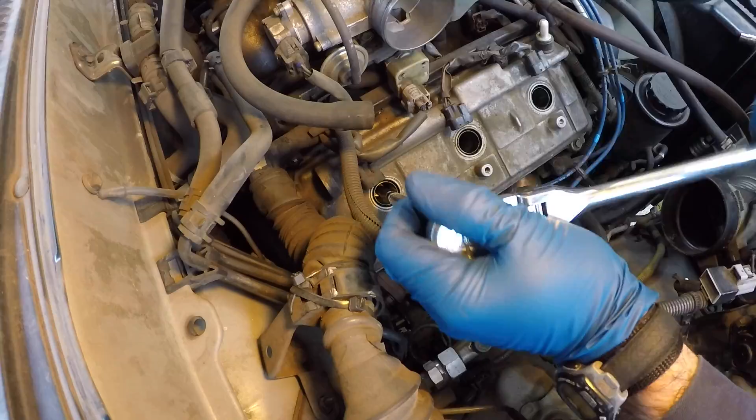What we're going to show you today is how you do a compression test on your engine. Now the engine we're going to be doing the compression test on is actually on my 4Runner. It's the Toyota 5VZ-FE 3.4 liter V6 engine that you'll find on the 3rd generation 4Runners, 1st generation Tacomas, some older T100s and older Tundras.

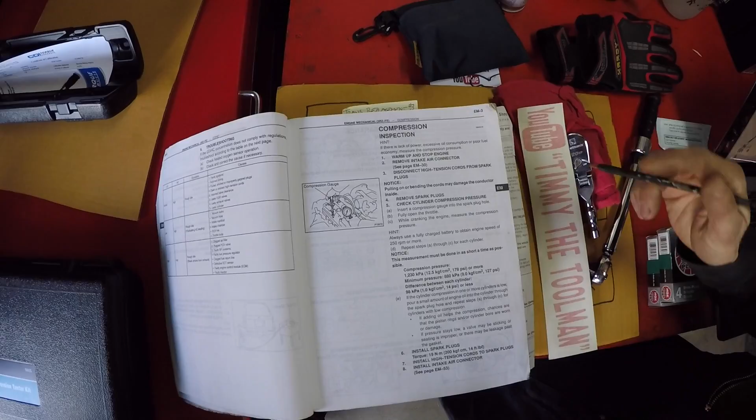A compression test is pretty straightforward. We're going to actually follow the instructions right out of the factory service manual. Let me show you some pages. So basically, they just tell you to start with a warm engine. So you warm it up and you get it to operating temperature.

And then the next thing you do is you remove the intake air connector because that gets in the way of the coil packs on the passenger side, and then you disconnect all your high tension cords, also known as the spark plug wires, and then you remove all the spark plugs, and then you start doing your compression check, and we'll show you that once we get to the engine.

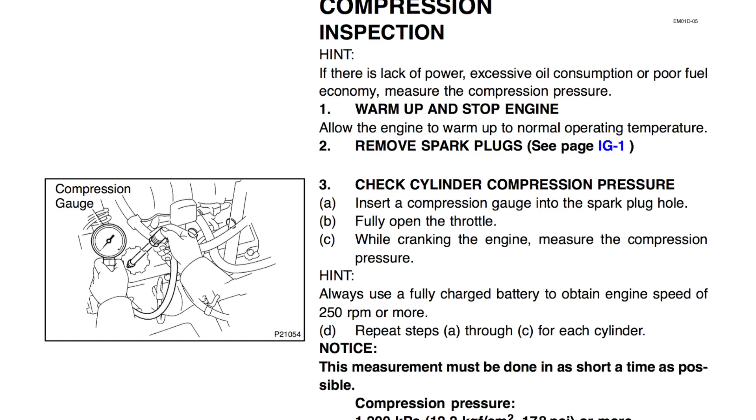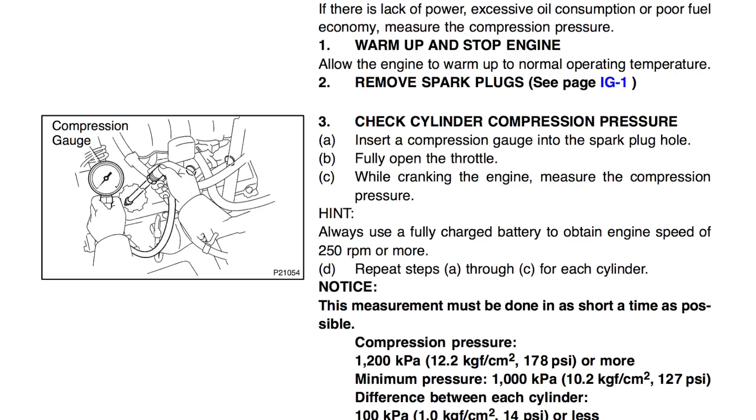Pretty straightforward. It tells you that you have to have a fully charged battery so you can obtain an engine speed of 250 revolutions per minute as you're cranking it over. It mentions having the throttle fully open, so it's called a clear flood mode, and when you push the accelerator all the way to the floor, it basically turns off the fuel injectors. That's the purpose of that, to get air into the cylinders but also to turn off the injectors.

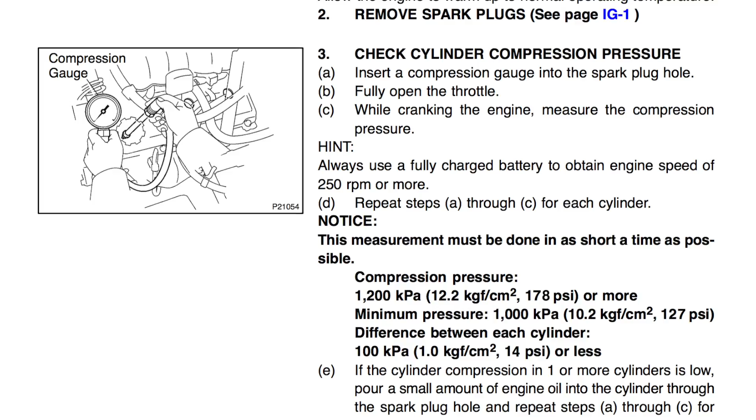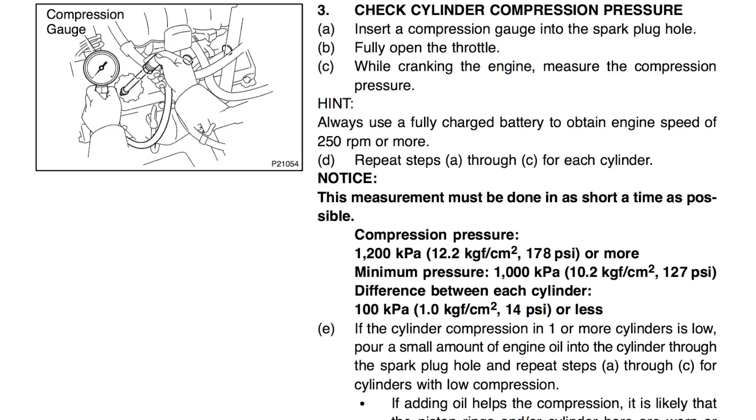Now some instructions say to pull a fuse to disable the fuel pump. Others say you disconnect an electrical connection at the fuel pump, which on our 3rd gen 4Runners is underneath the passenger seat. But you really don't have to do that, because by putting it in clear flood mode with the pedal all the way to the floor, you're going to be turning off the injectors. So you don't have to worry about any gas going into the cylinders while you're doing this compression test.

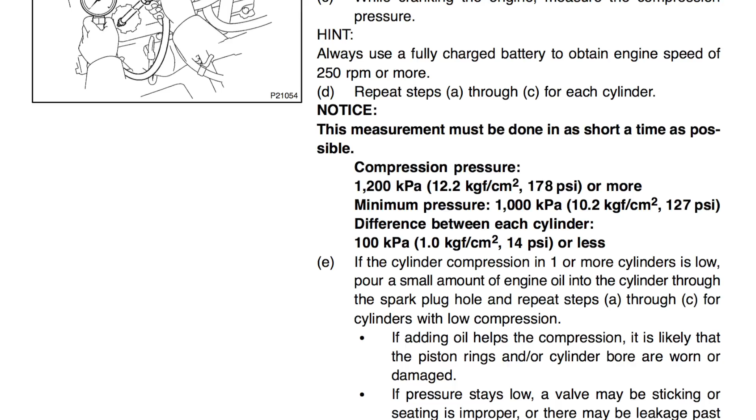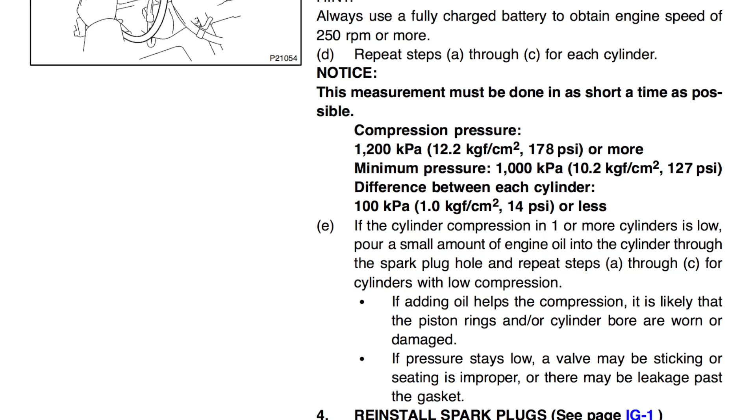Another thing, you have to disconnect the ignition, and by disconnecting the coil packs and the spark plugs, you're basically taking out the ignition component. So no gas, no spark, and then you're ready to go. It also talks about what kind of pressure you're looking for. So ideally you're seeing 178 PSI or more, and your minimum pressure, you don't want any less than 127 PSI, and you don't want to see any more than a 14 PSI difference between the cylinders.

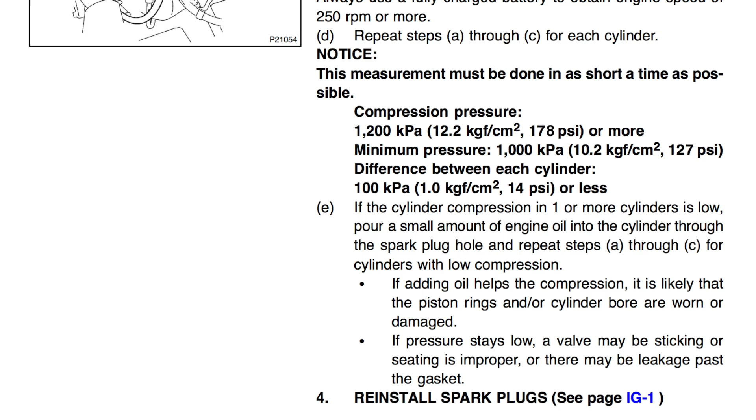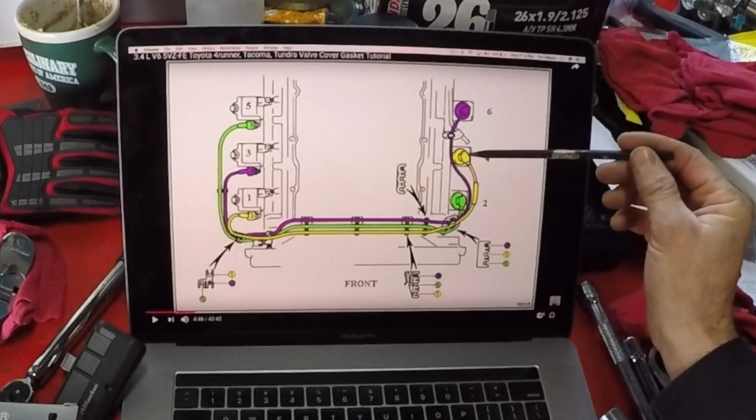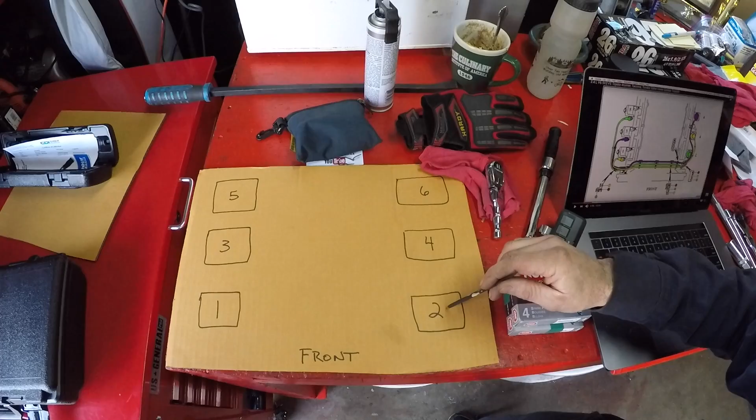Then I transposed that information to a piece of cardboard. When I pull the spark plugs out, I'm going to lay them in their positions. So later on, when I analyze what the plugs look like, I could see just from the wear on the plugs, maybe it'll give me an indicator of something going on with that actual cylinder. So I'm going to keep track of where the plugs go and put them on this piece of cardboard. It makes logical sense when you're going to be doing this.

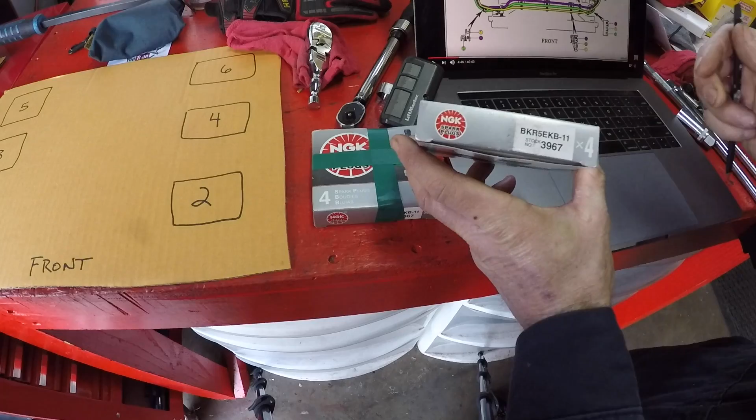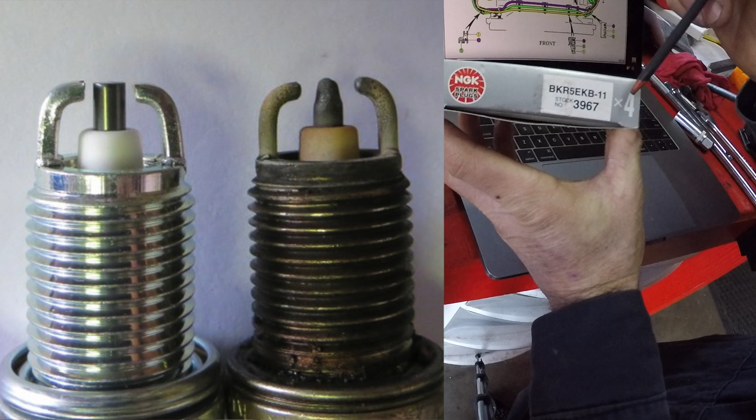If it's time to replace your spark plugs, get some new spark plugs. So these are some NGK spark plugs, and the ones I've got are the BKR5EKB-11, stock number 3967. These are the dual electrode spark plugs that are recommended that you use with your 3.4 liter V6 engine.

The special tool that you need to do this job is some type of compression tester. Now I decided to buy one from OTC because I do like their products. They're fairly high quality. So the OTC kit I got is number 5605. And so when you open it up, it has a list of instructions right on the lid for you to reference.

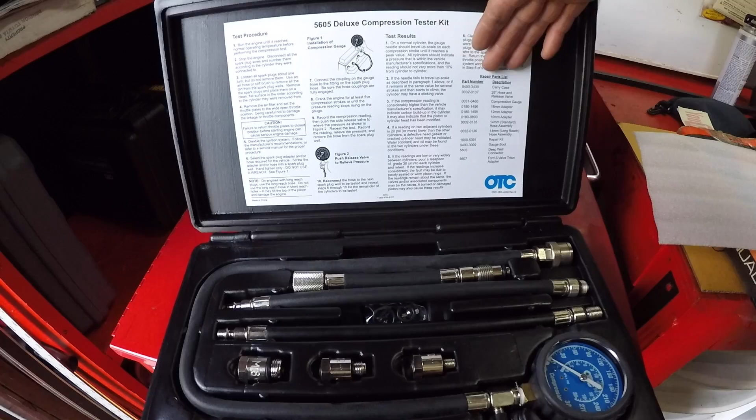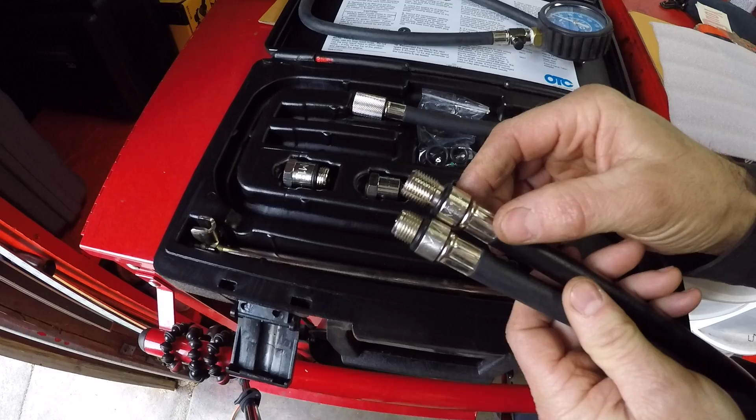And then when you go down, you look at all the tools. This is the main thing that you're going to be using. And then you have these different adapters. Because the spark plugs that I'm going to be using have a long thread, I'm going to use the longer thread one as opposed to the shorter one. So these are both M14 size. So the kit gives you this.

And then it gives you some other adapters if you happen to have M18 spark plug holes, or M12, or an M10. And then it's got this deep spark plug tube application. This is supposedly for a Ford 3-valve Triton engine. So we're not obviously going to be using that, but it comes with it.

Do you have to buy one from OTC or another Matco or Snap-on? No, you don't. You can probably find an affordable one at Harbor Freight, or just look online on Amazon.

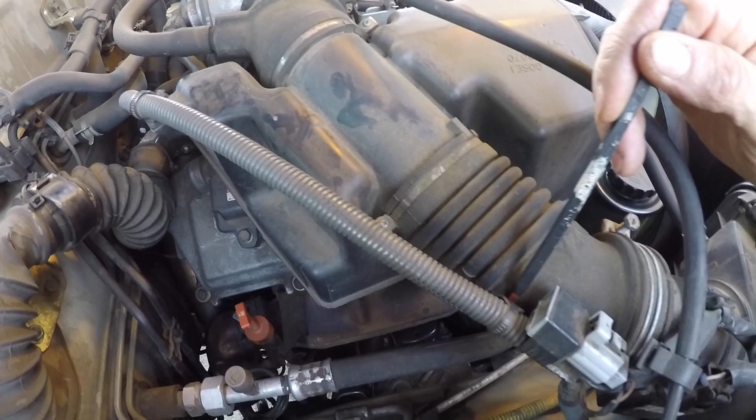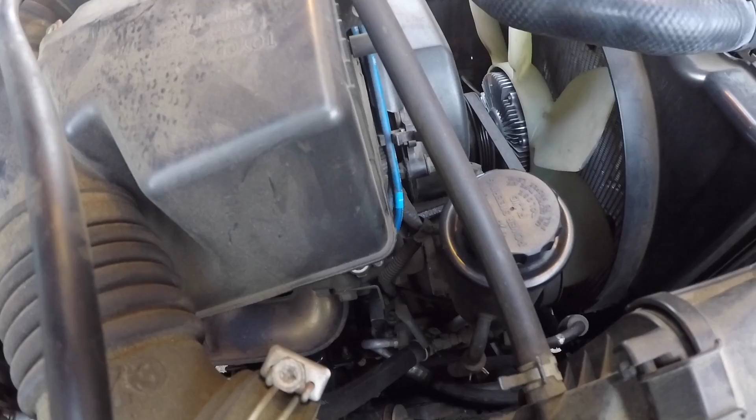Then there's an air hose right here that I'm going to slip off. There's also this air hose right here that I'm going to slide off. And then this air hose just clips in here, and I'm just going to pull this free of this clip. Just pull it out right there.

The last two things I have to do to get this air box free is there's two clamps. There's one for the connection at the throttle body. I just got to loosen that clamp and pull back and slide this off. And then there's this other clamp that attaches the air hose to the air box. I'm going to loosen that and pull that off. So then this whole thing will be out of the way to where I can get the coil packs off and start getting the spark plugs out.

Okay, I'm going to attack this clip with just a flathead screwdriver. This clip is a little bit worn out already from me removing it. So you just got to compress it and get it out of there. There we go. See, a little munched up, but it still works. This other one here just has one little clip on this side, and I'm going to pull this little rubber thing away and push up to where it frees it. Now this wiring harness is no longer attached to the air box.

I'm going to slip this thing off right here. Just twist it a little bit, break it free. And now that's off. I'm gonna twist this one, break this one free. Okay, that's disconnected. And this one just simply slips out of the clip.

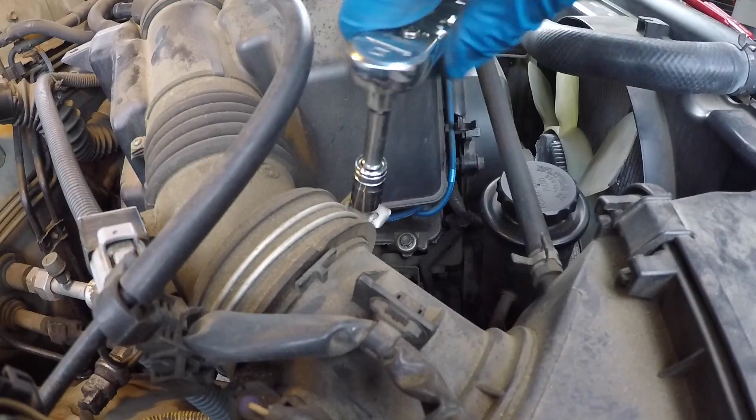Now all I have to do is loosen these clamps. You could do it with a Phillips head screwdriver because it's got a Phillips head on it. But I'm just gonna choose to use a 10mm socket with a 1/4" drive, and I'm just gonna loosen the sucker up. Okay, that should be loose enough. I'm gonna loosen the other one. Okay, and that should be loose enough also. So now you just wiggle this off.

So it's off the air box for the most part. And now I gotta wiggle it off the throttle body. You gotta fish it through these wires. Get it out of there somehow. Okay, now that's out of my way. Now you can see that I have access to the coil packs. So I could take those off and get the spark plugs off.

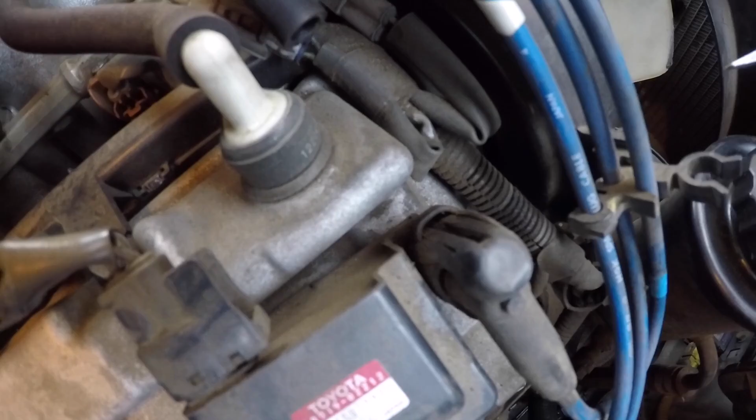So the first thing I'm going to do is I'm going to disconnect the spark plug wires that go from the coil packs on the passenger side over to the driver's side. And there's a clip on the back you have to pull away and then lift up, and it's free. Do the same with all the other ones.

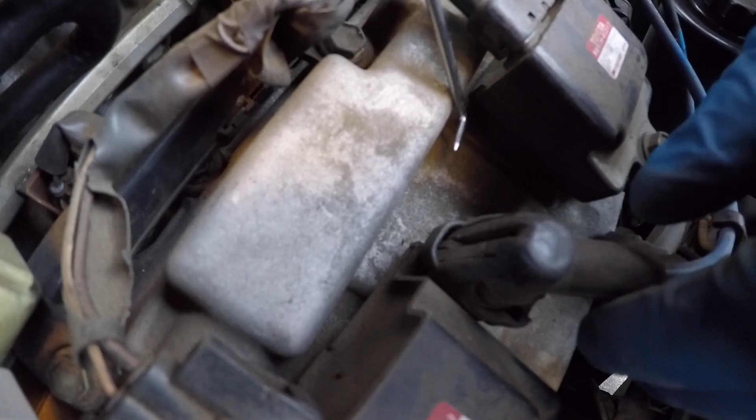I'm finding it a little hard to get a screwdriver in at the right angle to get these next ones. So I just have this little cheapo pick tool that I got as a kit from Harbor Freight. It's just a 90-degree pick, and I could slip it behind the clip and pull towards the center of the engine and then pop it off. And I'm gonna do the same with this one. Just slide that behind there, pull towards the center of the engine, and then pull up. And now they're all free.

And if you look here, I really don't have to worry about getting them mixed up, because the shortest one is going to go to the front, the next longest one is going to go to the middle, and then the longest one is going to go to the rear. So you have to actually try to mess that up.

The next thing is I'm going to disconnect the electrical connection to the coil pack itself. We got a squeeze tab right here to disconnect the electrical connection. So if I push this in, it will free this and I can pull it away. So I just push with my thumb and pull back, and then it's free. And I'll do the same with the other ones. That one's free. And that one's free. Okay, now I can get the coil packs off.

There's a lot of 10mm bolts on these engines. So I'm just going to zip it off with my Milwaukee cordless. There's one. Get this next one. There's two. The last one. Now I'm going to pull off the coil packs.

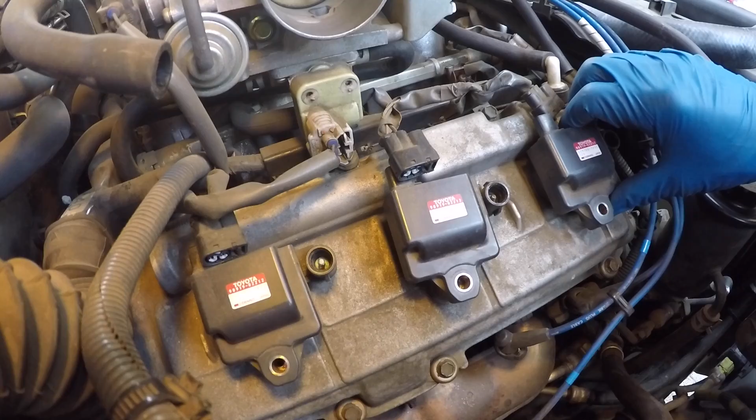Now, if you are having some type of misfire problem, I would suggest labeling these so you remember which one was which. So as a technique to diagnose what's going on with your engine and you're going to be swapping coil packs, I would make some type of mark either with a paint pencil or with some tape, with writing on the tape. I'm just going to keep them in the same orientation as they take off. I'm going to put them on the cardboard that I made.

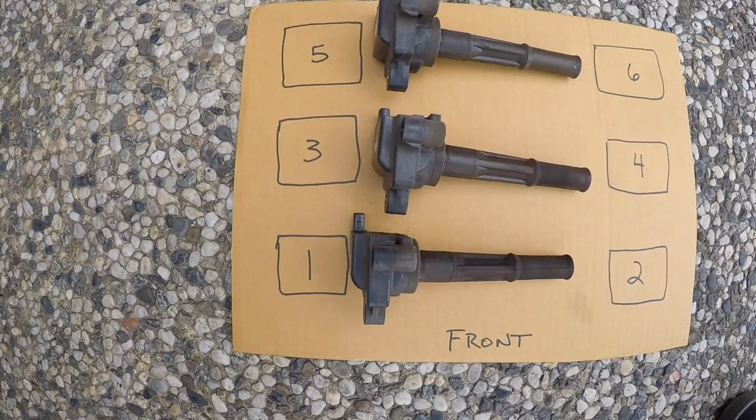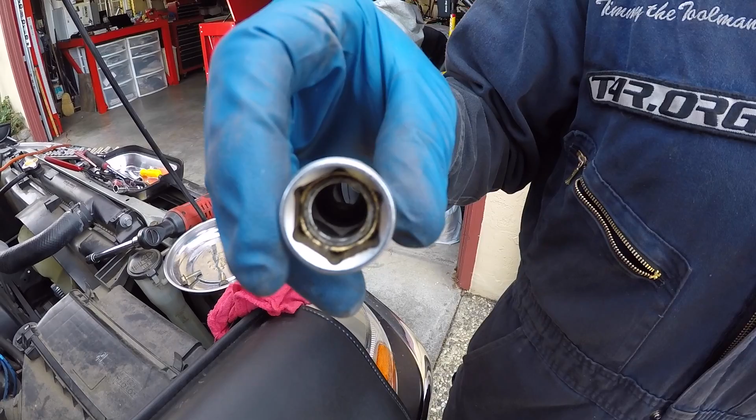So here's the next tools I'm going to use. I'm going to use a 3/8 drive, a long 3/8 extension, and this is an actual spark plug socket. Now there's a couple different types of spark plug sockets. Some have a rubber grommet on this inside diameter so it actually holds onto the spark plug, but I have this cool magnetized one, so as you completely unthread the spark plug from the head, it will bring the spark plug with it because it's magnetized.

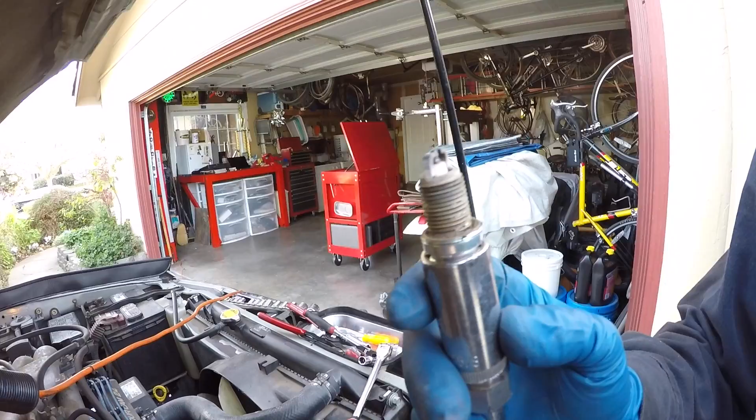So let me remove this one. And remember, this is cylinder 1. Okay, and you can see that it brought the spark plug with it. And these are a double electrode. These were iridium plugs. It's been 57,000 miles since I changed these.

Now, should I have changed them sooner? I'm not so sure, because the iridium plugs were supposed to last 60,000 miles, so I'm right at that mark. But I'm going to take this off and I'm going to put it down on the cardboard. So this is the number 1 cylinder. Now I'm going to get the next ones.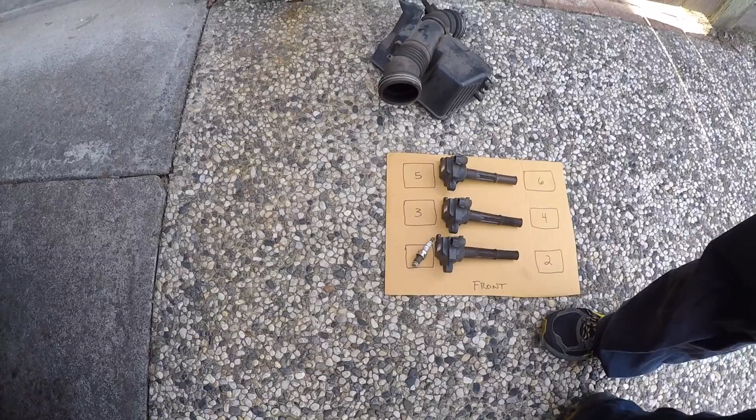Once I break it free and it's hand tight, then I just spin it out with the extension. You no longer need the ratchet. Okay, they're looking about the same. This is cylinder 3.

And this is cylinder 5. So I'll put that on the cardboard. Now the driver's side is a little bit harder to get to because you have plenums in the way, you've got the dipstick, you got a lot of junk in your way to get these spark plug wires off the spark plug. So you have to get your hands in there.

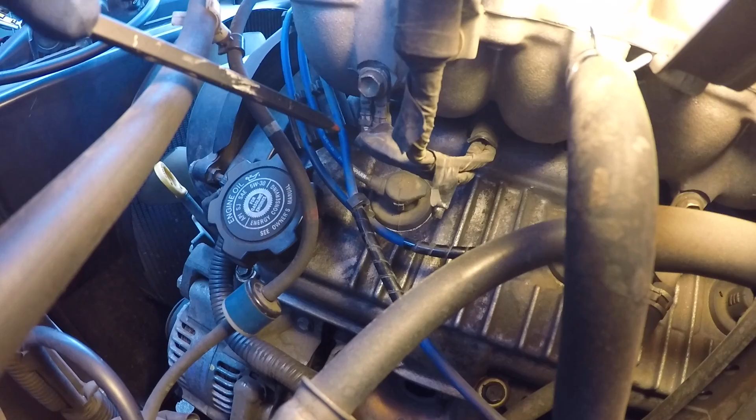They do make this special tool, this spark plug tube wire tool, but I found that it doesn't really grab on as tight as I'd like, so I'm better off just getting my hands in there. And what is suggested is that you don't want to pull on the wire, you want to be pulling on the boot itself. It's a little bit hard. There we go, that one's out.

I'm unclipping the wires from their little holder to where I can get a little more movement. So I got this one out of the way that's clipped onto here, and I'm going to move this clip, maybe pull this clip all the way off right now so I don't lose it, and I'm going to pull this spark plug wire out if I can.

I haven't done this before, but I decided I'm going to take this dipstick out of my way so it's easier to pull the spark plug tube wire straight out and it's not going to fight me as much. So I'm just going to get this ground wire out of the way for right now. Just going to put that bolt back in so I don't lose it. Now I can pull this thing straight out a lot easier. Okay, so that's the first one out of the way. Now I'll work on the next one.

These spark plug things actually do work fairly good. So I got this one free. Get that one out of the way. Again, you'd almost have to try to mix these up because they're all different lengths. I'm just going to move that one out of the way, and then I'm going to get the last one, which is maybe the hardest one to get to because it's way back there.

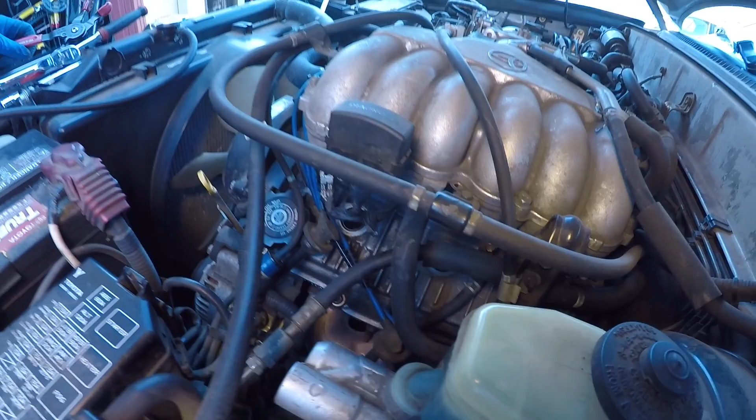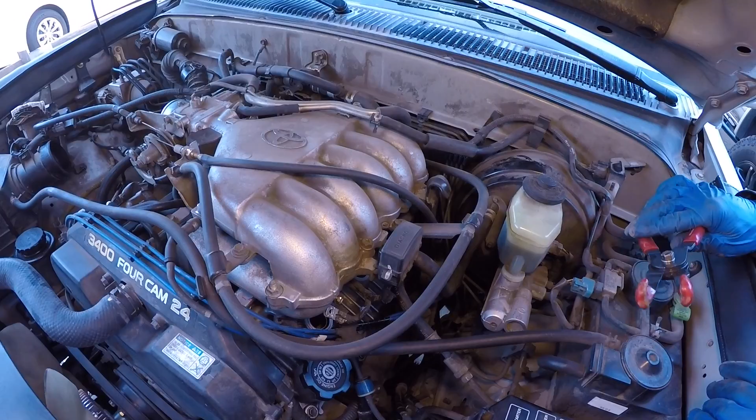Okay, I'm using my spark plug tube wire pullers, and it worked again, pretty good. So now all 3 spark plug wires are off the spark plugs. Now I can get these out. So I'm gonna go in on this side now. Okay, this is the number 2 cylinder. It seems this bracket for the throttle cable is in the way, so I'm just going to remove this 10mm nut so I can get the bracket off. Okay, and I'll just put that bolt back in so I don't lose it. Now I should be able to get a straighter shot at this spark plug.

This is the number 4 cylinder, and the final one will be the number 6 cylinder in the back of the driver's side. And then there's that spark plug.

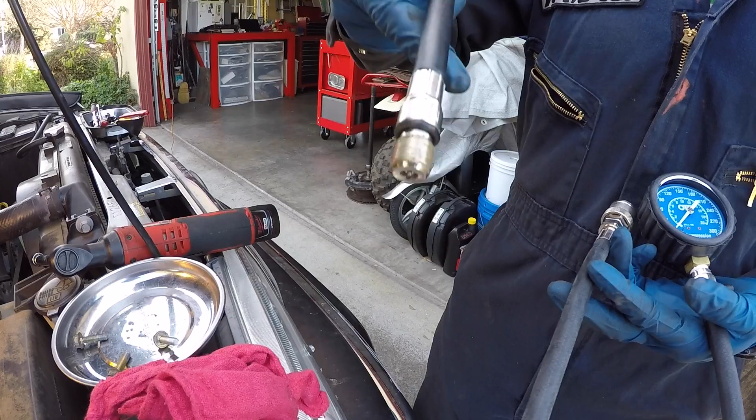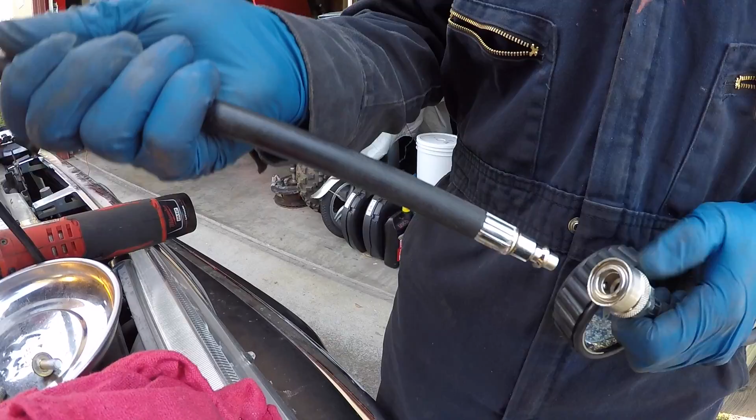Okay, the 2 things for my OTC compression kit: I need the actual compression gauge with the long hose, and then it will connect to this that I screw into the cylinder head on each cylinder. You see the O-ring here. This O-ring makes a seal, just like the spark plug will make a seal down below with the crush washer it comes with. This is going to make an airtight seal, and then we connect it up with a quick coupling, kind of like an air hose coupling, like so.

And then I'll have Sean turn over the engine. When the needle stops rising, I will record that number on the piece of cardboard that I have the spark plugs on, and then we're gonna go to the next cylinder. So the flexible hose makes it nice, especially when we get to the driver's side, but we're on the passenger side right now. So I'm just gonna stick this in and feel for the threads, and it should go in easy.

So I feel that the threads have caught, and I'm just gonna thread this in hand tight. I wanna make sure that the O-ring is seated, and that should be good. I got it hand tight. Now I'm gonna grab my compression gauge. I'm gonna pull back the sleeve and connect it just like you're connecting up an air tool.

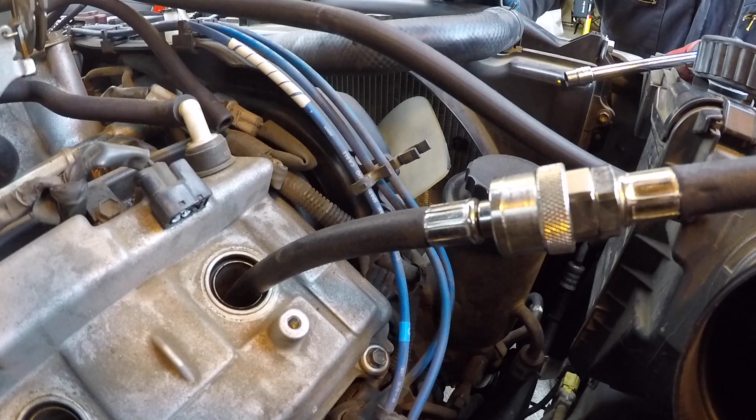Now the next thing we have to do is you need a partner for this unless you have a remote start. So remember that clear flood mode that I talked about. This is a mechanism that's built into the engine where if you have the gas pedal all the way to the floor, so you have the throttle plate all the way open, it's telling the computer not to send gas to the cylinders.

It's acting like the engine is flooded. This turns off the injectors. Sean's gonna get inside the vehicle. He's gonna push the gas pedal all the way to the floor, and then he's gonna crank over the engine till I tell him to stop.

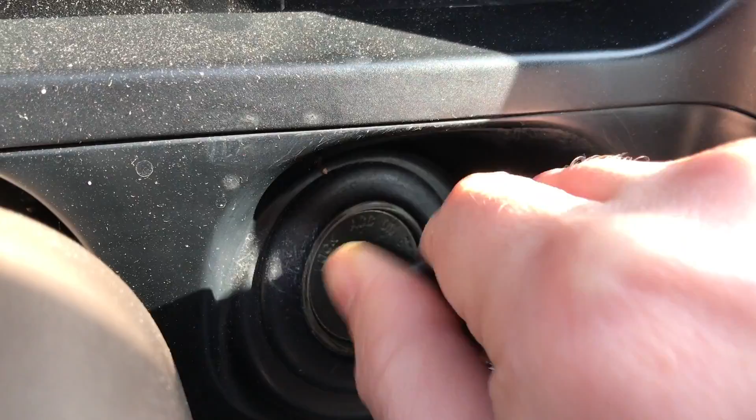Okay, so now Sean is gonna push the gas pedal all the way to the floor. So you saw the throttle plate open all the way. Now he's gonna turn over the engine till I tell him to stop. Okay, stop. That cylinder went to right about 210.

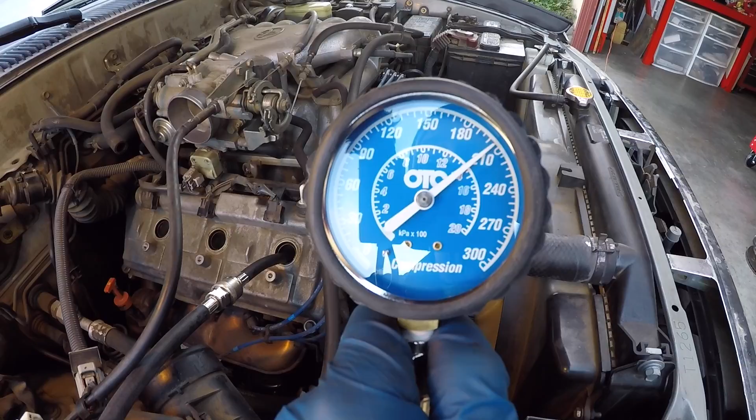So now we're gonna go to the next one, and we're gonna do every cylinder just like I just described, with Sean in the vehicle with the gas pedal all the way to the ground, and he's gonna turn it over until I see the needle stop rising. Okay, now we're on the next cylinder, which is cylinder 3. Sean's gonna do the same thing. Put the gas pedal all the way to the floor and crank it over till I tell him to stop. Go ahead, Sean.

Okay, stop. And that one also went to 210. And what I didn't mention before is you can release the pressure right here, pushing this button. Then it makes it easier to disconnect the quick coupler. Okay, now we're on cylinder 5, which is the furthest most back on the passenger side. Go ahead, Sean.

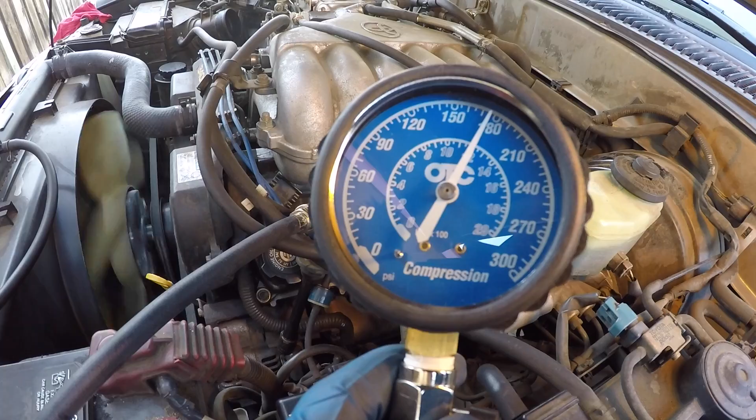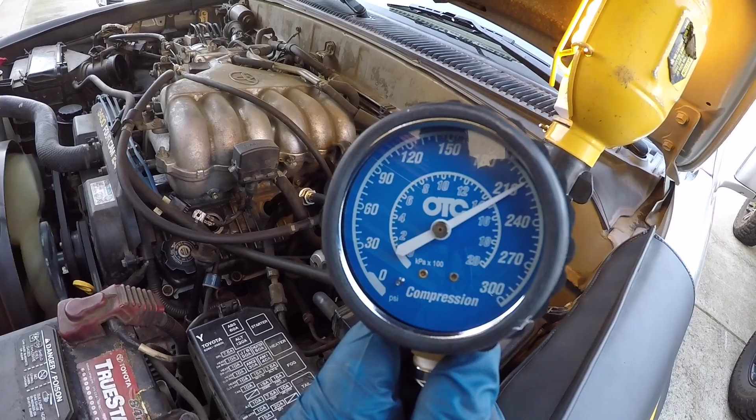Okay, stop. That one actually went to about 190. Okay, go ahead, cylinder number 2. Okay, stop. Okay, now we're on the middle cylinder on the driver's side, cylinder 4. Go ahead, Sean. Okay, stop. We're on the last cylinder, cylinder 6, which is the furthest most back on the driver's side. Go ahead, Sean.

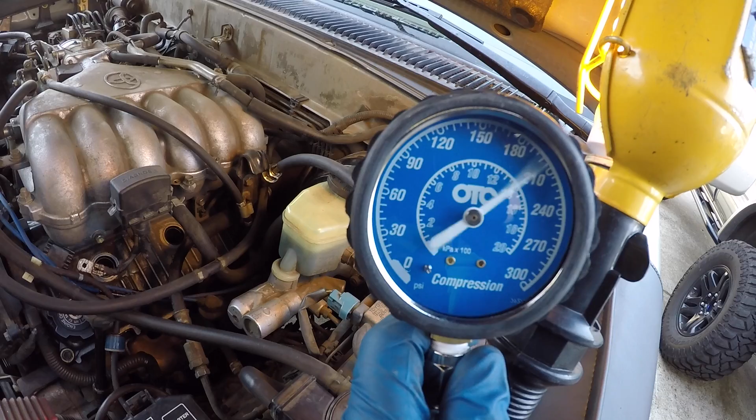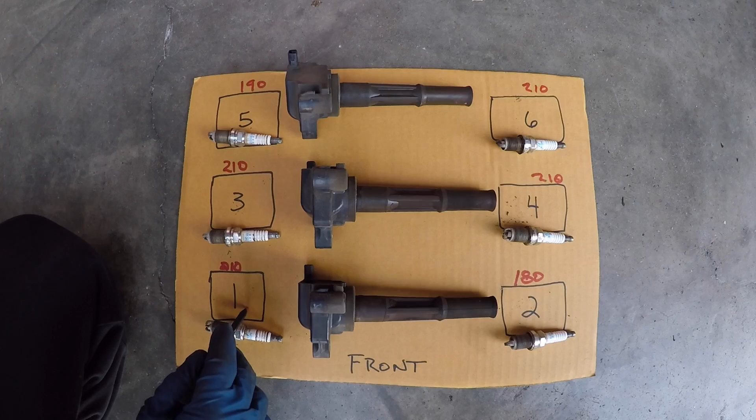Okay, that's good. So here's the results, front to rear. So again, the front of the vehicle's here. This is the passenger side. So cylinder 1 came up with 210, cylinder 3, 210, cylinder 5, 190. On the driver's side, cylinder 2 was at 180, cylinder 4 was again 210, and 6 was 210. So the lowest cylinders on my engine were cylinder 2 and cylinder 5.

Remember, the factory service manual said that you're looking for 178 or higher, and the difference that the factory service manual suggested between the cylinders is no more than 14 psi. I'm obviously over that. My highest cylinders were at 210. That was 4 of the 6 cylinders were at 210. One was at 180, one was at 190. So am I overly concerned about this? Not really, because at least the compression on all my cylinders is pretty good. They said that you'd want to see 178 or higher. So my most problematic cylinder is cylinder number 2 on the front, on the driver's side.

Now you might be wondering, why did you actually have to remove all the spark plugs for this test at the same time? Well, remember that a low compression value could mean that you have a head gasket problem. With the head gasket, it could be leaking out into the coolant channels, but it also could be leaking out to the adjacent cylinder. If I kept the spark plug in this cylinder while testing this one, and I did have a problem with the head gasket between the 2 cylinders, then I would get an inaccurate result. It would actually show the compression is good when in reality it's not, because there's a loss of compression between the cylinders. So that's one of the reasons why you remove all the spark plugs at the same time when you do this test.

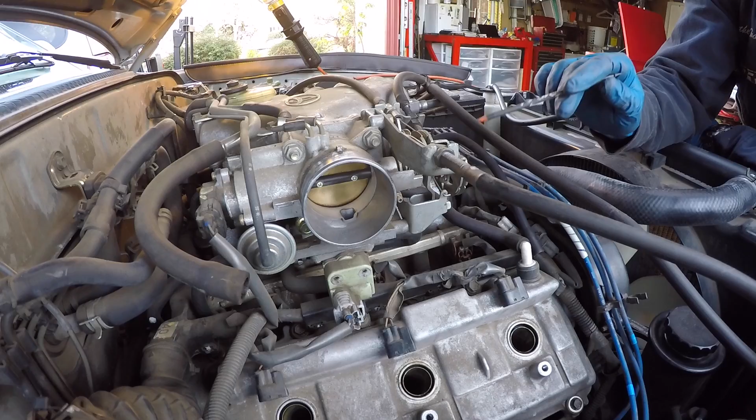Now, opening the throttle supposedly puts it in clear flood mode, but we were clearly smelling gasoline doing this. I'm sort of thinking now that even though the factory service manual says you don't have to disconnect the fuel pump, I would reference our video on replacing the fuel filter, the link will be above here, and we show how to disconnect the electrical connection to the fuel pump by going behind the driver's seat, lifting up the passenger seat, and pulling up the carpet and disconnecting that. So you can check that video to see how we did that. So I think if I did it again, I would disconnect the fuel pump because I am smelling fuel.

The other thing is when we were turning the engine over, we were hearing a weird popping sound, and I don't know what that is, but I hope once I get the spark plugs back in, nothing's wrong with my engine.

So I have no clue what that is, but I just wanted to let you know that. So when you're doing a compression test on your 3.4 liter V6 engine, you're not freaking out that you hear some weird noise while you're turning over the engine.

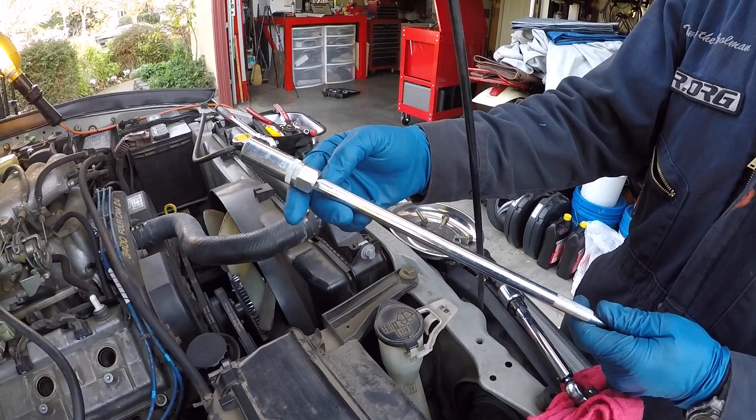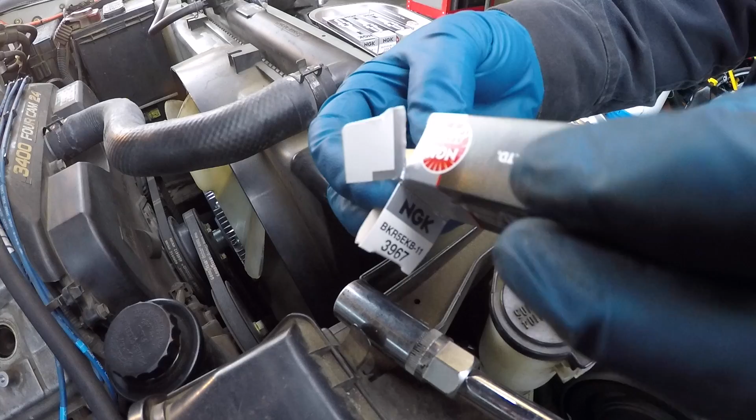Now that we completed our compression test, we're going to get our new spark plugs back in. So again, grab your long extension with your 5/8 spark plug socket, and then let me show you something with these spark plugs. If you're ever wondering if you changed spark plugs before, they come pre-gapped. So the whole reason why they have this little sleeve in here is to protect the electrodes so they don't get smashed in shipping or when they're on the parts shelf. So that's what these little sleeves are for, to protect the electrodes. So you can pretty much be confident that the gapping is going to be correct and they didn't get smashed.

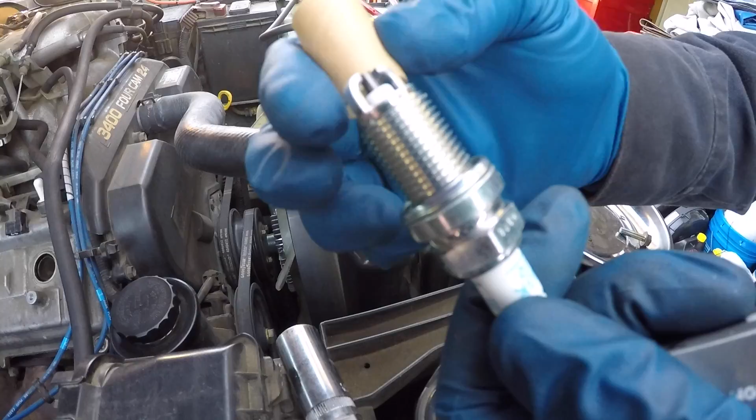So I'm going to slide this in here and the magnet's going to hold it. And now I'm just going to go down into the cylinder. The main thing you want to make sure is you don't cross thread and damage your head. You should be able to thread this in all the way to where it reaches the crush washer on the spark plug. So now that's in there. If you're wondering what the crush washer is, it's this little washer right here, and it's got a rounded side to it. Once it hits the cylinder head, it crushes down and holds the spark plug in place better.

I normally don't use a torque wrench for spark plugs. I've changed a lot of spark plugs in my life, but I am going to do it this time just to show you on the video. So the factory service manual says the torque spec for the spark plugs is 14 foot-pounds. I'm choosing to use my inch-pound, so I did a conversion, and 14 foot-pounds is equal to 168 inch-pounds.

So you're going to feel it kind of crush down that crush washer, and then it's going to start getting tight. And that means you've compressed the crush washer all the way, and then it clicked at 168, and I'm done with that one. Okay, we're going to do the same thing. We're going to get them started by hand first and then torque them to 14 foot-pounds or 168 inch-pounds. You just do the same thing. And remember, the driver's side is going to be a little tighter, but since you moved those electrical connections and bracket out of the way, you'll be able to get the spark plugs in no problem.

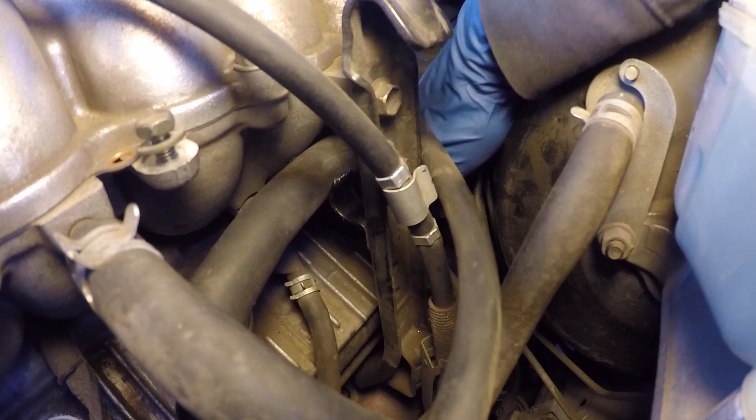We got all the spark plugs back in, and now we're on the driver's side, and we're going to start pushing the spark plug wires back onto the spark plugs. So you slide it down, and then you actually feel it snap on to the end of the spark plug. So you push down, and you could feel it seat, the electrode connection connecting to the spark plug, and then you know that you got a good positive connection, and you could go to the next one.

So again, slide it down into the hole, and then push down and feel it pop into place. There we go, that one's good. And the last one. Again, push down till you feel it snap in place. There we go. Now we got to get some of these brackets that we moved out of the way.

So see this tube right here? I pulled this tube out of its little slot to help me get access to that rear spark plug. So I'll just push that back in place. There was a bracket here, so I got to get that bracket back in place. I'm just taking this 10mm bolt out, and don't drop it, Tim. Putting this back on. I hope nobody's going to worry about a torque spec for this. It's just a little bracket holding the accelerator cable. So I'm just cinching this up with a 10mm socket, and I'll slide this back in place. That's for the accelerator cable.

I found that the dipstick was getting a little bit in my way getting the spark plug back in, so I slid it off its little clamp. So I'm going to slide that back on, and then I have to get this ground strap back in, and I have the bolt for that. I also noticed this little bolt was kind of getting in the way of getting a straighter shot with the extension for this front cylinder, so I just took it out the rest of the way.

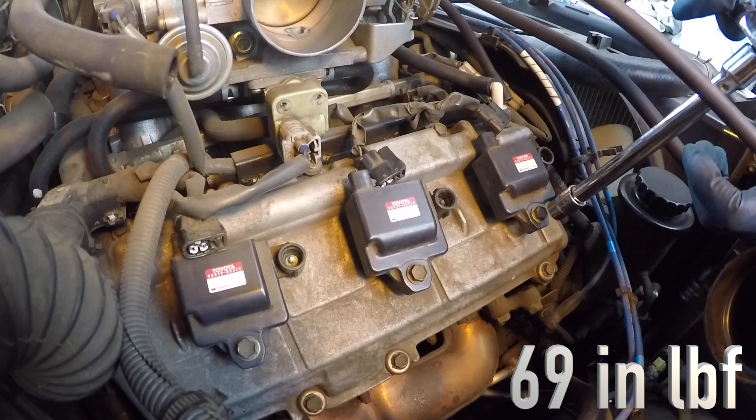I'm going to get one of the bolts started, and then I'm going to torque these actually. So I'll give you the torque spec for these. So I'm just going to get them started, and then I'm going to get the next one in. This one slid into place, and a bolt started, and the last one. So the torque specs for these 10mm bolts that hold the coil packs to the valve cover are 69 inch-pounds. Very light torque spec. That's it. Super light.

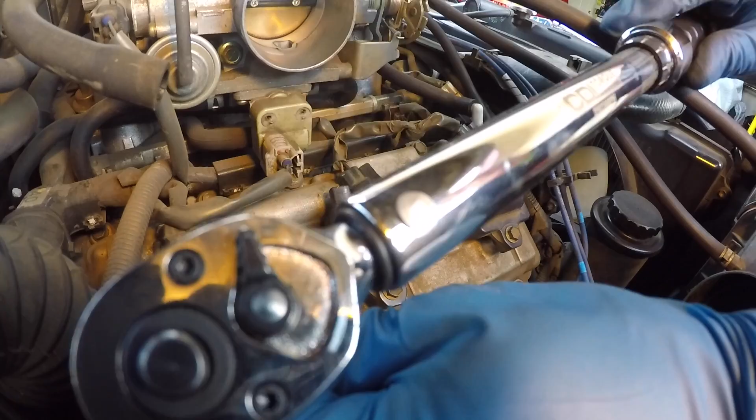Now we're gonna reconnect our electrical connections. Just snap them in place. Okay, now we got to get our spark plug wires reattached. So again, these just snap in place also. And then a good test is pull back a little bit and make sure that they're all the way seated. So if it's snapped in place, you won't be able to pull back on it.

So now we're going to get the air box back in place. Go underneath this. How am I going to get this in? Go in like this, maybe. Yeah. Go underneath the cruise control. Gotta finagle it around. Choose what side you want to get in first. I don't know if it matters. I'm going to get the air box side in first. And then be careful with these things. If they're a little bit old, they're kind of brittle, so don't tear it. Got to get it pushed back and then wiggle it on. There we go.

And finally got it. So now I got to tighten these clamps up. Again, you could use a Phillips or a 10mm socket. I'm going to use the socket. Doesn't have to be super tight, just snug, so you don't have an air leak. Okay, and get the other one. Okay.

So now I'm going to get all the tubes that I disconnected. So I'm going to slide this one on here. And then I'm going to slide this in its clip right here. I'm going to go back here and slide this one on here. And then now I just got to push these clips for this wire harness in place. So bring it up, snap it in place, and then push this one in place. It slides into this flexible rubber sucker there, and that should be it. Everything should be reconnected as it was.

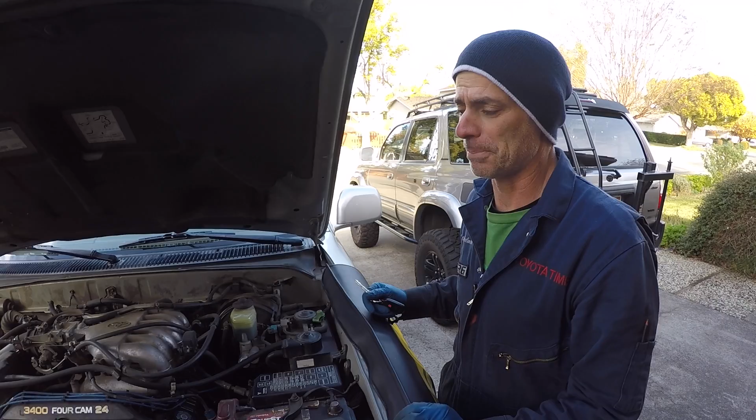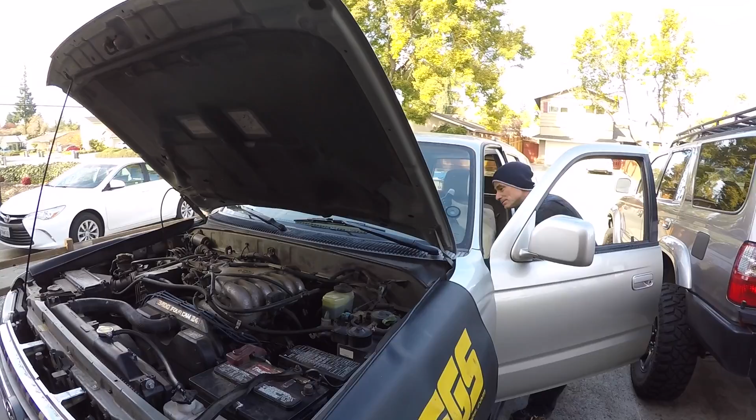Now I'm going to start it up, and hopefully nothing weird happens, because the only thing that's causing me a little bit of worry is that popping sound as the engine was turning over. I have no idea what that was or what was causing it. Let's start it up and see what happens. Starts fine, so I think it's good.

Now, the compression test is a pretty good diagnostic tool to tell you the health of your engine, of all the cylinders. You could actually tell some things just by looking at your plugs. If it was really oily, then you could assume that oil is getting past your rings and your piston rings are a little bit worn out. I'm not going to try to profess that I'm an expert at reading spark plugs and what you'll be able to read by looking at them.

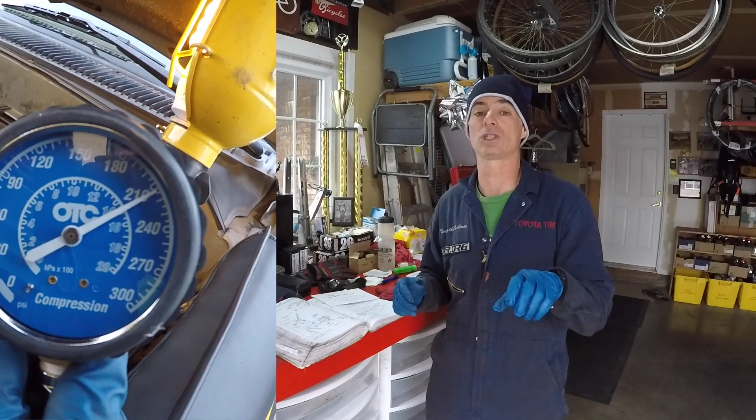And what I found is both those cylinders came up to 210. If you remember, the number 2 cylinder was at 180 and the number 5 cylinder was at 190. So now I'm even happier with the results, knowing that they pretty much all came to 210 psi. So my engine is in pretty darn good shape. What I'm trying to say is make sure that your engine is at operating temperature. Make sure it's really hot, and strip the parts off the engine quickly. Don't dilly-dally around, and get your compression test done when the engine is still really warm.

The other thing that I wanted to mention is that on both occasions, after I disconnected all the spark plugs and did the compression test, when I got back in and started the vehicle, I had a check engine light. And because I have an OBD2 Bluetooth reader going to the Torque Pro app, I was able to read it really quickly, and it came up as a 1300 for a powertrain fault. So I just cleared it out, and I don't know why it causes a powertrain fault.

But that's something to note: if you see the check engine light after you get done with this compression test on your Toyota 3.4 liter V6 engine, or on whatever engine you're doing it on, just use a reader, whether it's a phone app, some type of scan gauge, or some other type of reader that you buy at an auto parts store. Check it out. Most likely it was because you were doing the compression test; you clear it out, and it never comes back. So I wanted to mention that. I hope you learned something today.